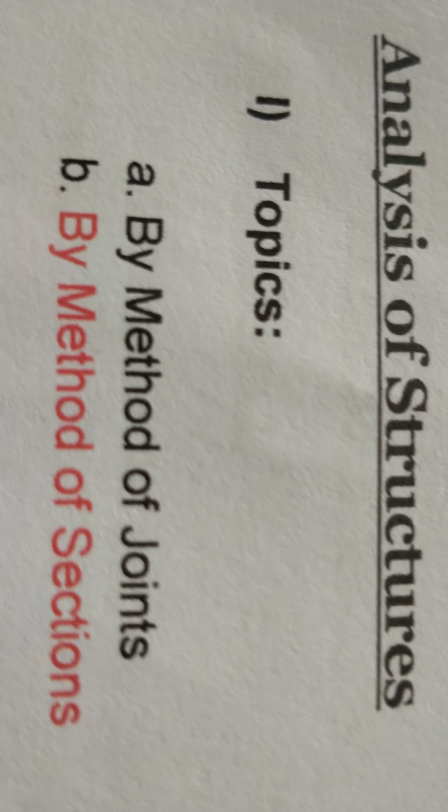Unlike the previous topic by method of joints, where you isolate joints, in this method of sections we are going to cut sections of any structure to analyze each member.

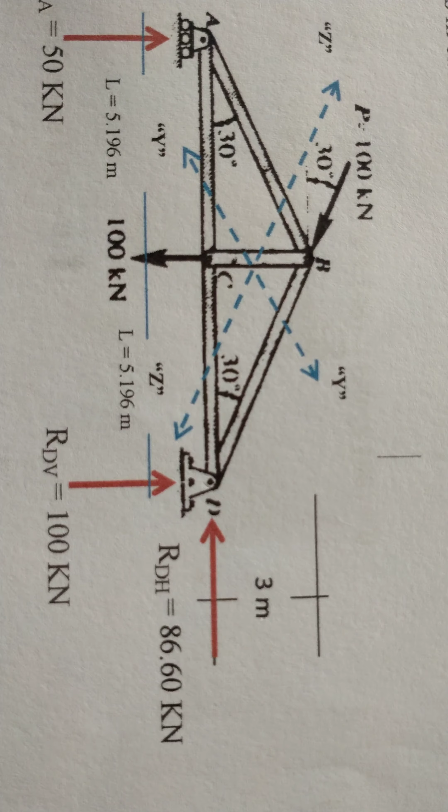This is a simple truss very similar to the example I gave you in the analysis of structures by method of joints. Don't be confused by the colored drawings, they are just there to help us analyze the problem.

What is important in this topic: one advantage of the method of sections is that you could immediately determine directly the stresses or forces in any member without passing through different joints.

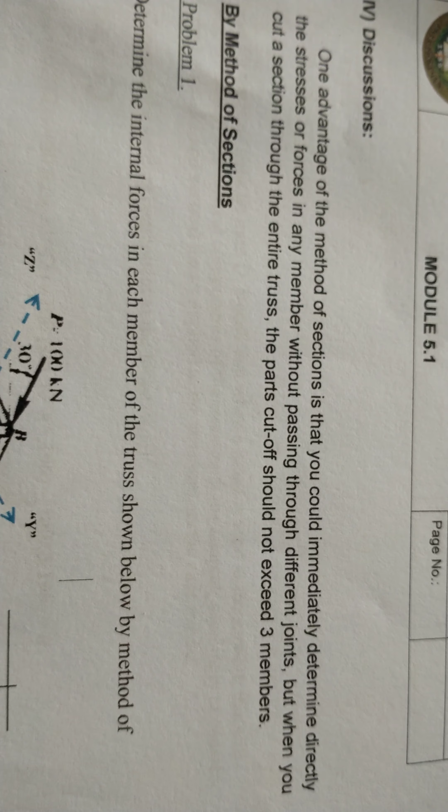But when you cut a section through the entire truss, the parts cut off should not exceed 3 members. So for you to understand this more clearly, we have this sample problem: determine the internal forces in each member of the truss shown below by method of sections.

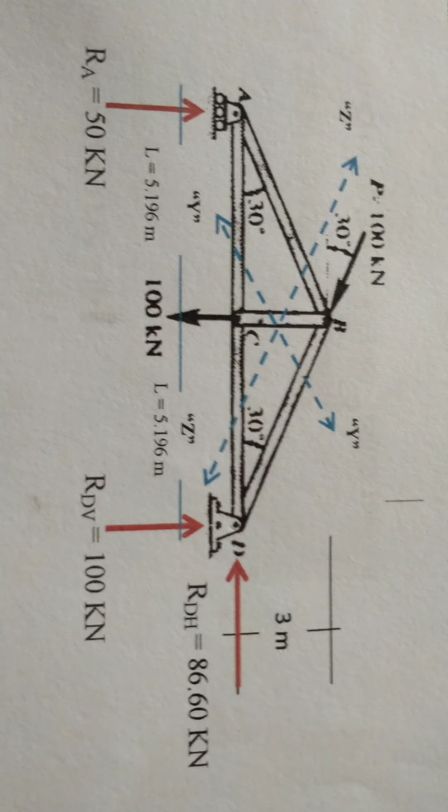So if you will notice class, let's focus first on the blue dotted lines, ZZ. ZZ on the left will be considered first because I deem it easier to solve. You will see this in the illustration later.

As we have been doing the process, we state the given, figure, and data shown. If there are important data that you should write, write them all as part of the given. And we have the requirements: the internal forces in members by method of sections.

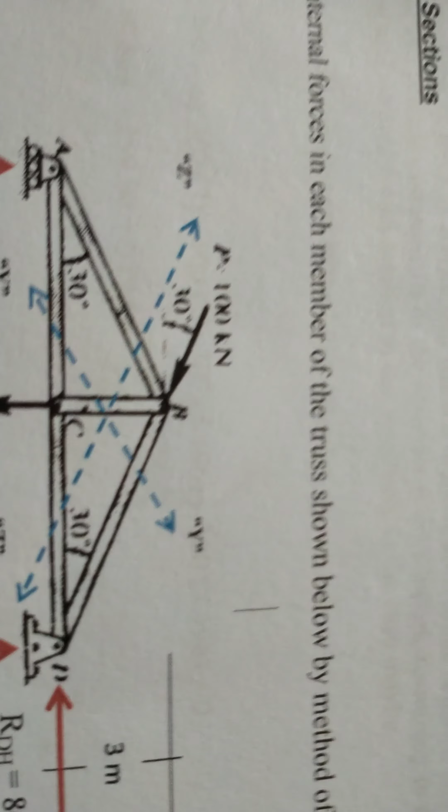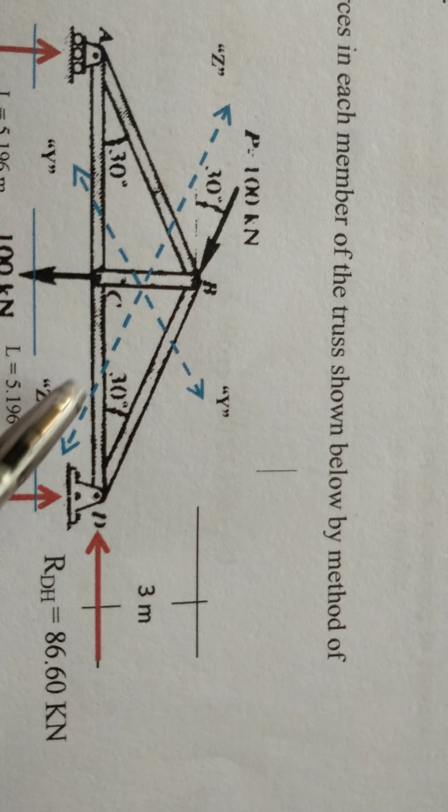So we have these members AB. If you will look at the figure, we have in here AB, AC, BC, CD, and BD.

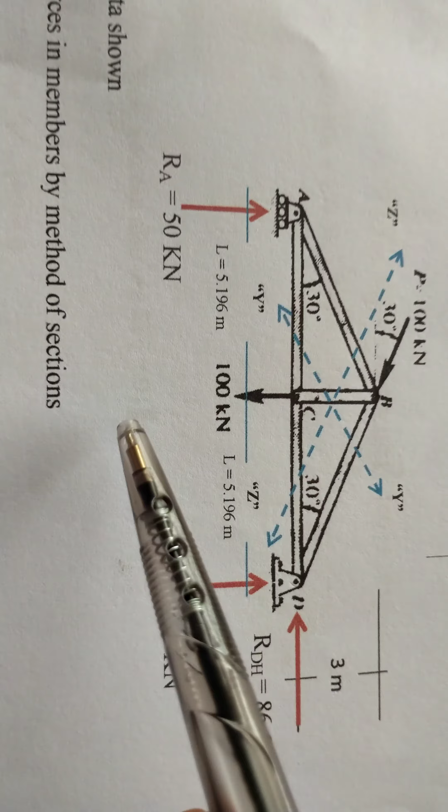For you to have a guide and easily solve the problem, you need to know first your L, because originally what are given are only the included angle, which is 30 degrees, the height of the truss, the load P, which is 100 acting 30 degrees horizontally on top of the truss, and a vertical load being carried by the truss, which is 100 kilonewtons.

As I've said, we try to simplify problems, or find whatever is necessary in solving a problem. With this problem, you need to know L, because if you are going to analyze structures by section, you need moment arms. So these are very necessary.

This one, the height and the length. Solving for your L, we have tangent 30 degrees. Tangent is opposite over adjacent, which we had previously as L. So we derived 5.196 meters.

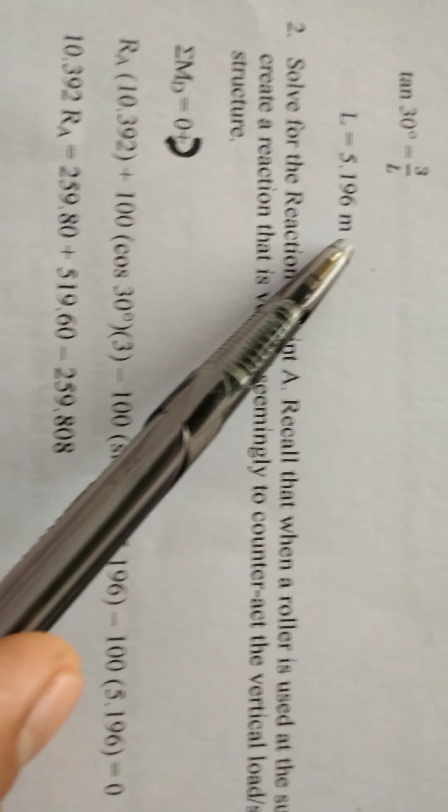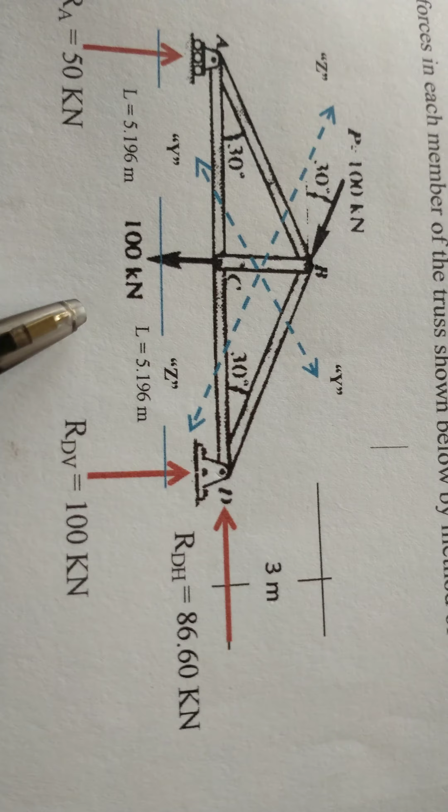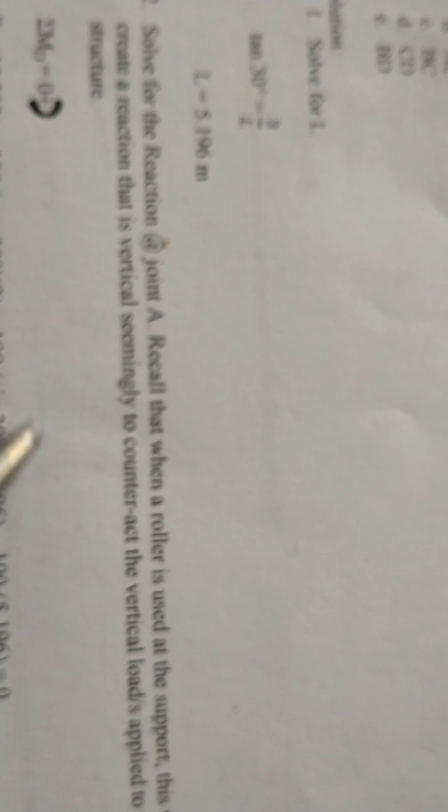So class, please observe that with your previous activities and exercises, I am very particular with units. Please always write down the units. If it is distance, it must be meters. If it is force, we use kilonewtons. And if we have moments, as previously discussed, moments are in kilonewton meter, because force times distance is the data being multiplied. So you need to indicate that also.

So in this case, you need to solve for the reaction at A, and in doing so, you need to take moments at D. So it is written here: summation of moments at D is equal to RA times the moment arm, RA times the moment arm from here. Okay, this is the moment arm.

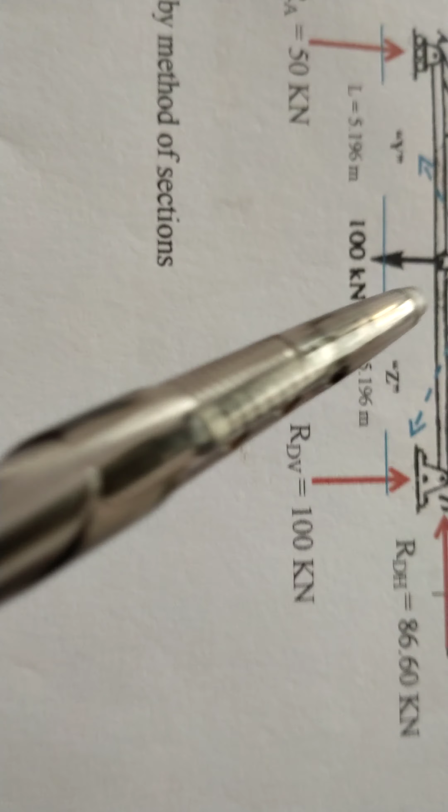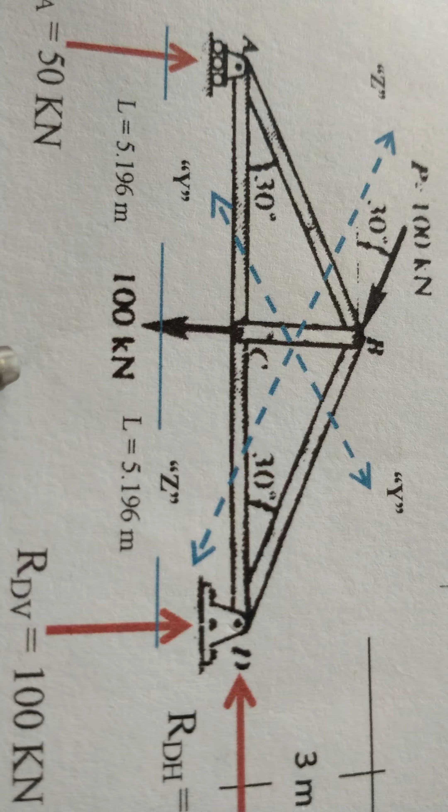5.196 plus 5.196 is 10.392. Then we have 100 cosine, because we are taking the horizontal component of 100, cosine 30 degrees times the moment arm from here. And we have minus the vertical component of 100, because it is going down, it will create a counterclockwise moment based from D. So 100 minus 100 sine 30 degrees times 5.196, because this will be the direction of the vertical component of 100.

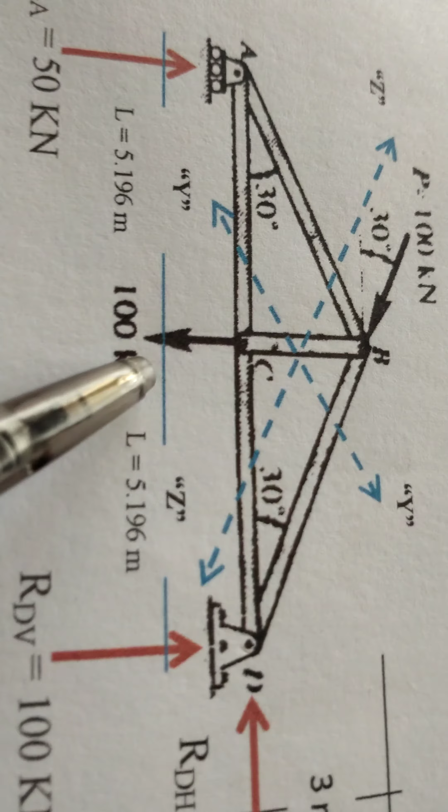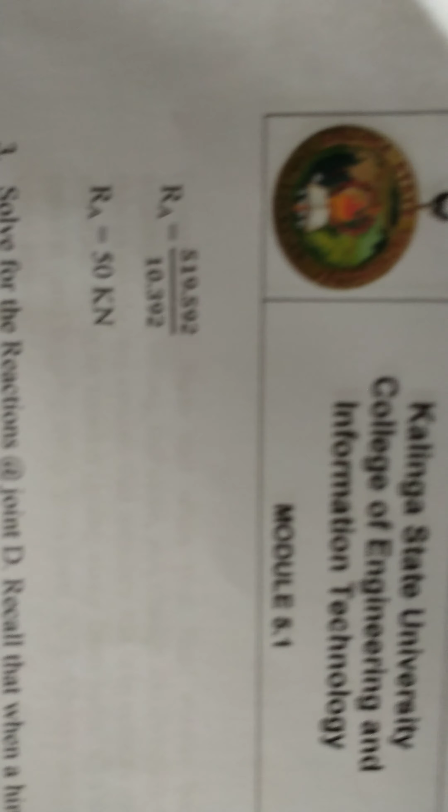Then we have 100, which is the given force, times the moment arm, which is 5.196, and it is negative because it will be acting counterclockwise. So computing this value, we have RA, the reaction at A, will be 50.0 or 50 kilonewtons.

And the next step will be to solve for the reaction at D. Since this is a hinge, it will create a horizontal and a vertical component. Can you follow, class? So we need to indicate the arrowheads of these two components.

So how are you going to solve for RDV? You just simply take moments at A, summation of moments at A, and you will arrive at this equation. So if you take moments at A, we have RDV times, what's the moment arm? 10.392. Then minus 100, which is the cosine of the horizontal force.

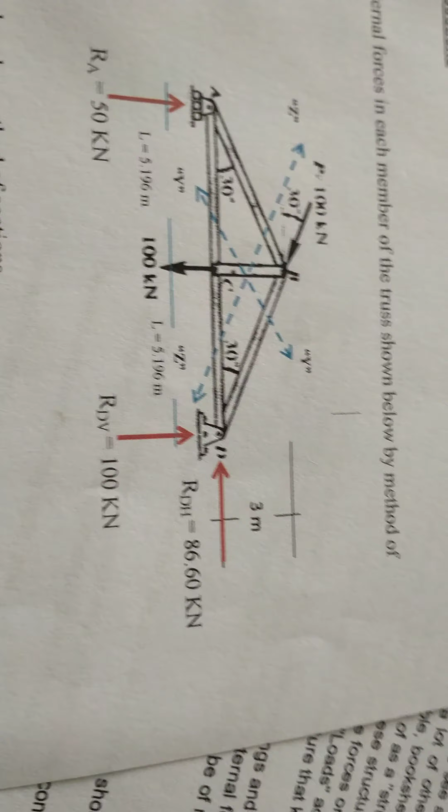100 cosine 30 degrees times 3. Okay, so going back again to determining the reaction or the components at D.

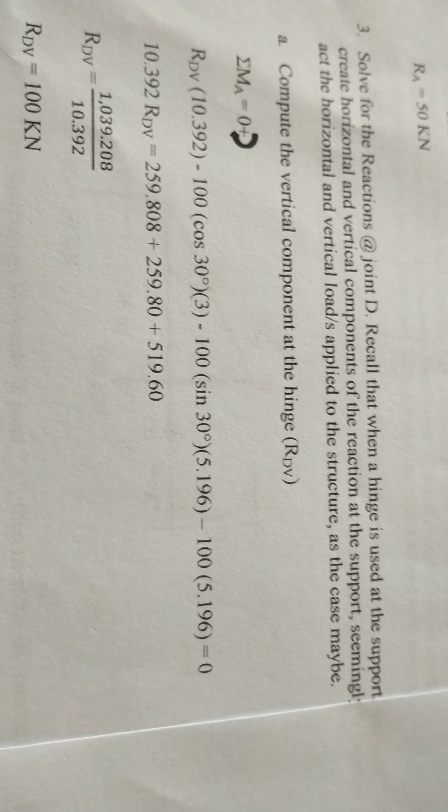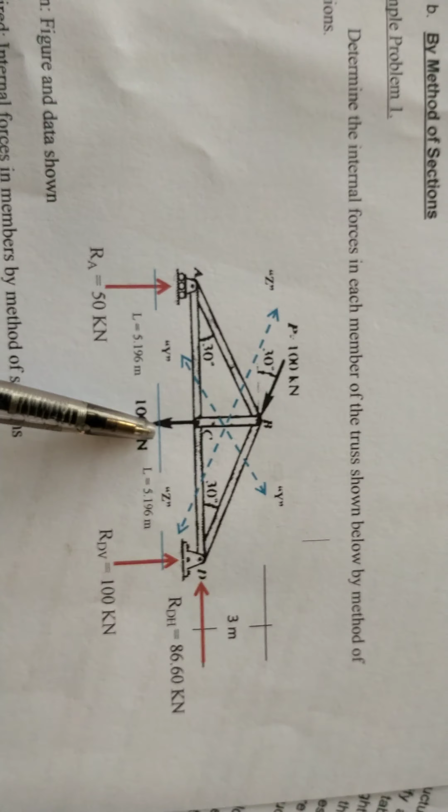So we need to take moments at A. If you are going to take moments at A, we have RDV, which is unknown, times the moment arm 10.392, minus 100 cosine 30 degrees times 3, which is the moment arm for the horizontal component of 100, and the vertical component, which is minus 100 sine of 30 degrees times 5.196, which is the moment arm, minus 100 times 5.196. This is the external load.

Going back to the equation, we derived RDV to be 100 kilonewtons.

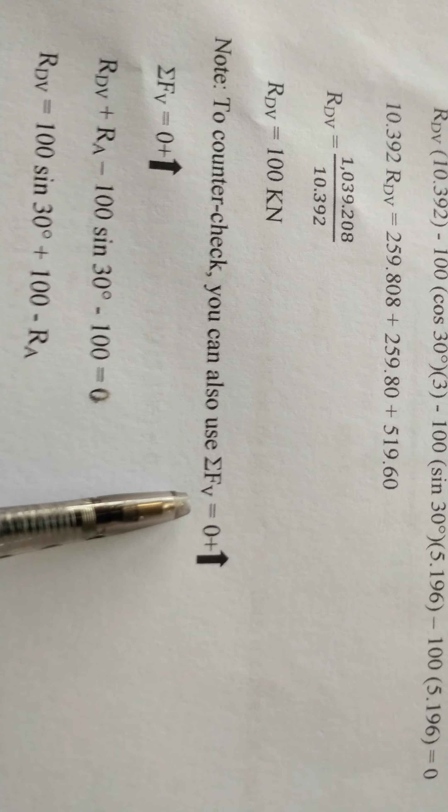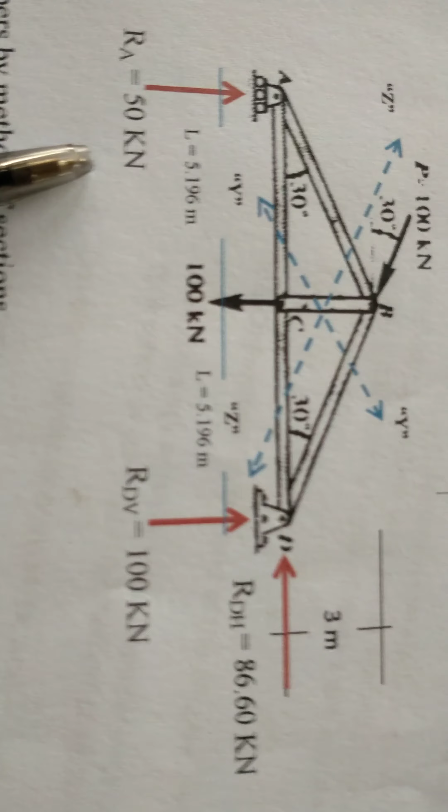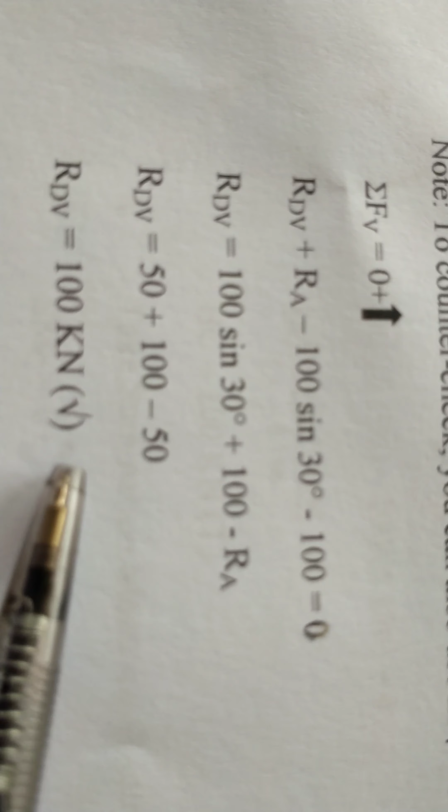Next, note that to counter check, you can also use summation of forces vertical equal to 0, positive going up. To counter check the value of RDV, since that is the unknown item, we have RDV plus RA minus 100 sine of 30 degrees minus 100, that will give you 100 kilonewtons. So it's correct.

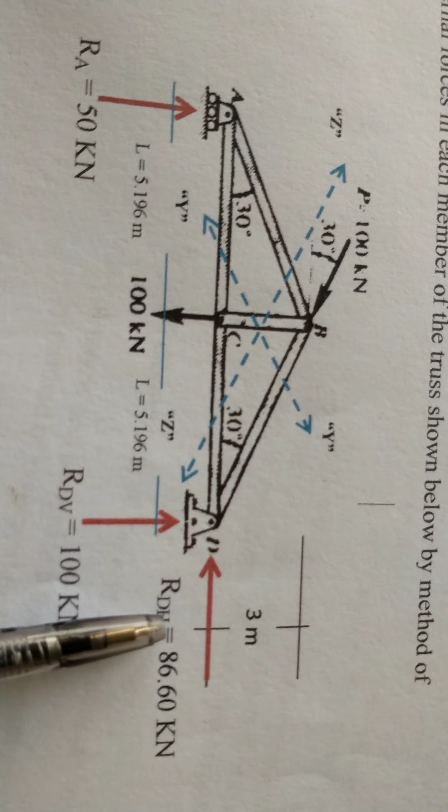Okay, next we have to solve for RDH. Just simply use your common sense here, because we have 100 kilonewton acting diagonally, and the effect of this load being introduced horizontally will be equal to this load.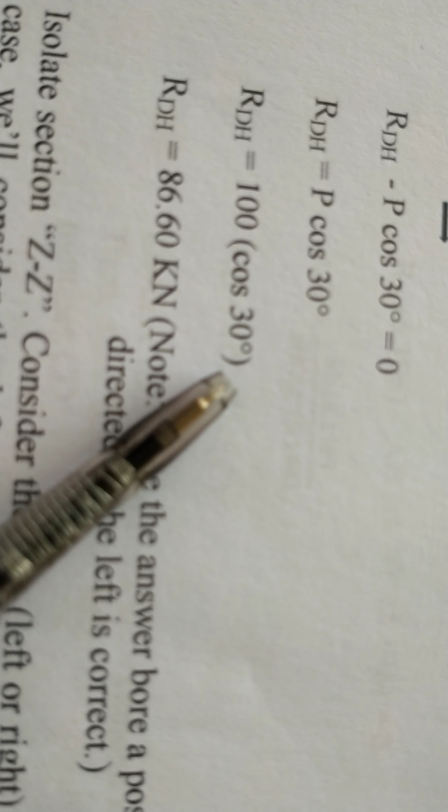Summation of forces horizontal is RDH minus P cosine 30 degrees equal to 0. So RDH is equal to P cosine 30 degrees. What is the value of P cosine 30 degrees? Of course, it is 86.6 kilonewtons.

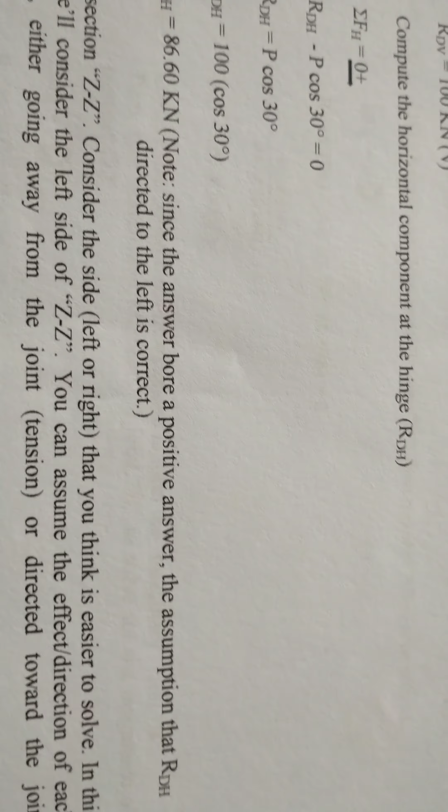As a reminder, note that since the answer bore a positive sign, the assumption that RDH is directed to the left is correct.

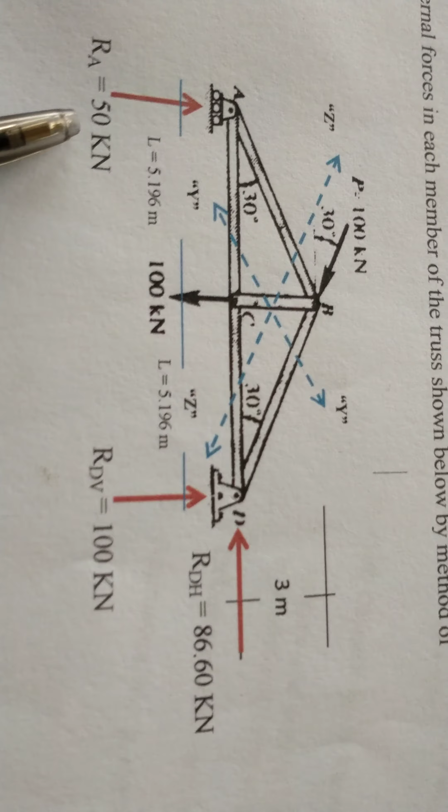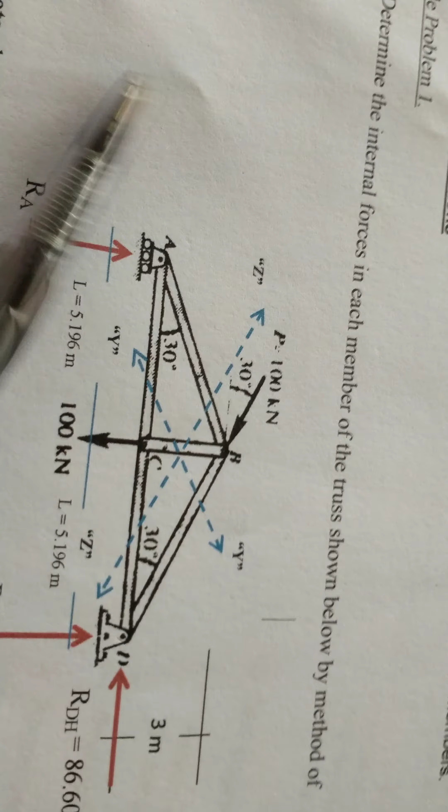Since all the values of the unknown items are already reflected, we already wrote them on the drawing, so for you to have a guide so that you will not be misled. Because if you consider this structure and this blue colored ZZ, which represents that this structure is cut here, in this particular case we try to consider this side, and all the items that you have computed or that are included in this section will be carried in the analysis, so that you will be coming up with correct answers.

Don't be misguided with that. So next is isolate section ZZ. Consider the side, left or right, whichever you think is easier to solve. In this case, we'll consider the left side of section ZZ.

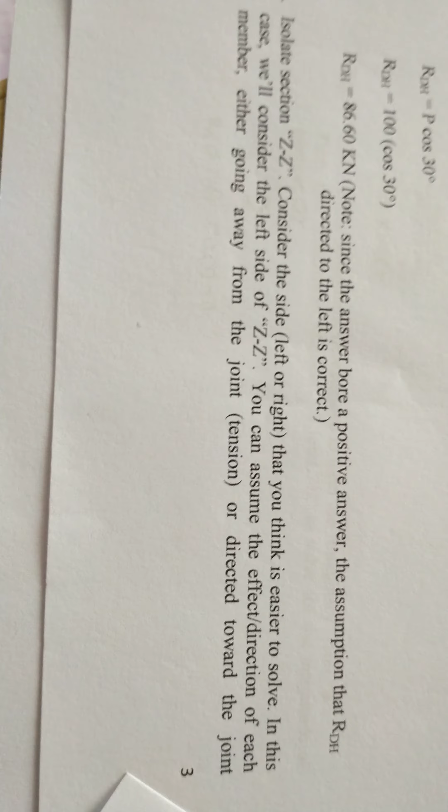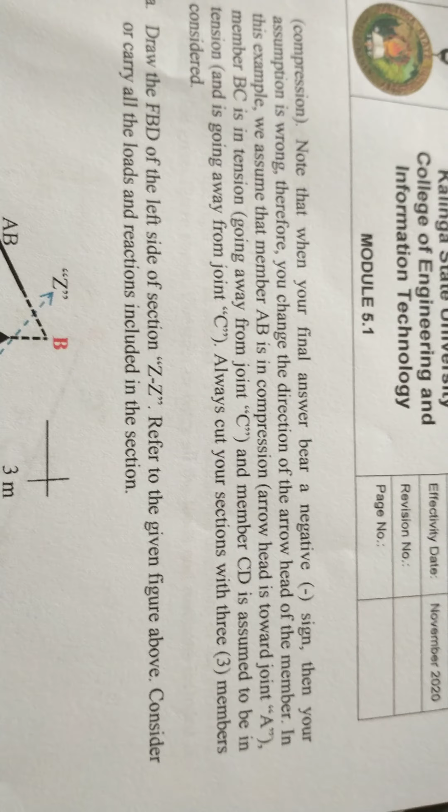You can assume the effect or direction of each member either going away from the joint, which means tension if the arrowhead is assumed to be going away from the joint, or directed towards the joint if it is in compression. Note that when your final answer bears a negative sign, then your assumption is wrong. Therefore, you change the direction of the arrowhead of the member.

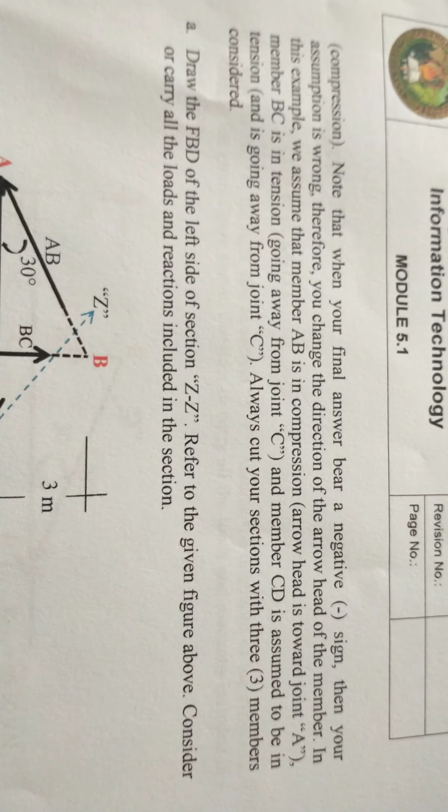In this example, we assume that member AB is in compression, arrowhead towards joint A; member BC is in tension, going away from joint C; and member CD is assumed to be in tension and going away from joint C. Always cut your section with 3 members considered.

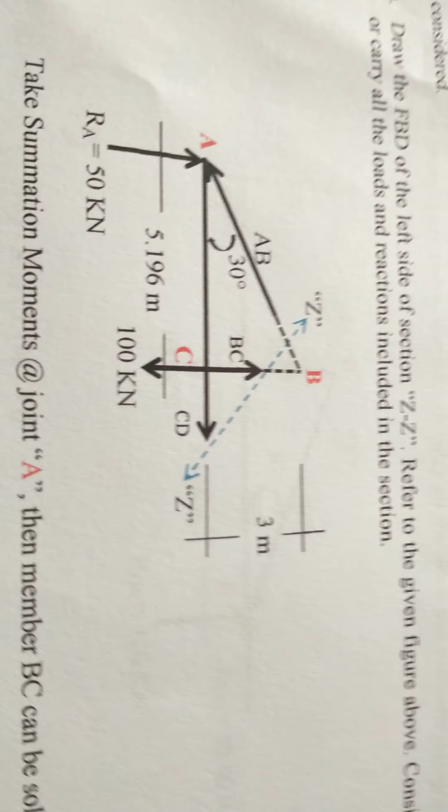Next step is to draw the FBD of the left side of the section, because that is the section that you considered. Refer to the given figure above, then consider or carry all the loads and reactions included in the section. If you go back to the original figure, ZZ is this one, so we consider this side.

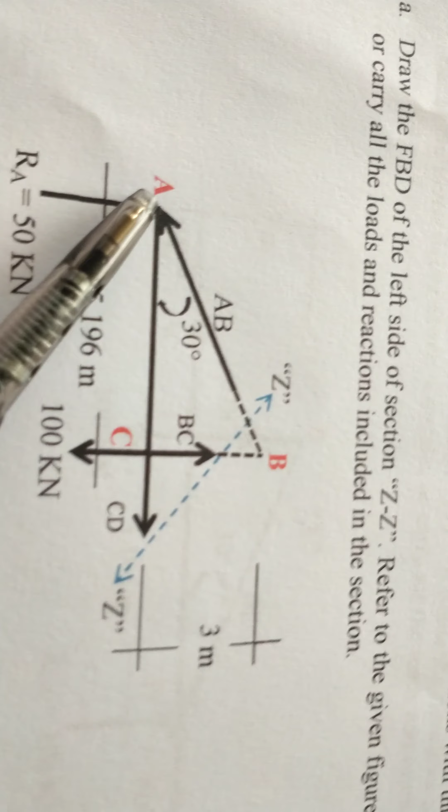As you can see, we have the 100 kilonewton, which is the external load, and the computed value of RA, which is 50 kilonewtons. We assume, as indicated here, AB is in compression, that's an assumption. BC, because it was cut, BC is in tension, and CD is in tension. So you carry again the measurement, or the dimension, and we have the same measurement for the height, which is 3 meters.

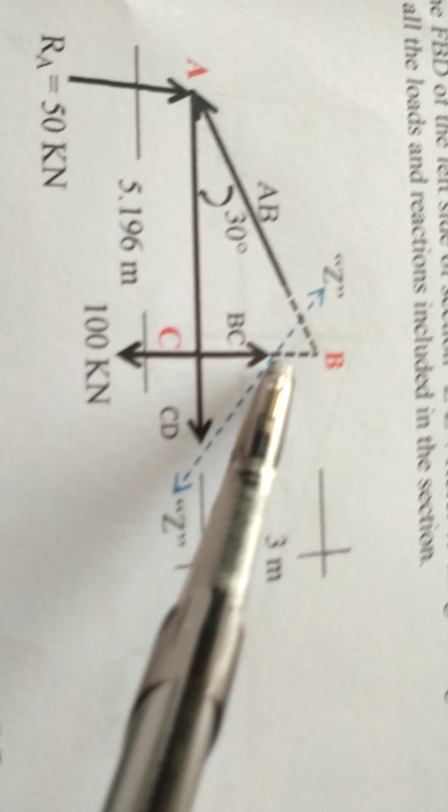If you observe, dotted lines are extended to form this joint B. Anyway, you'll discover later on why we did this. So we have this figure.

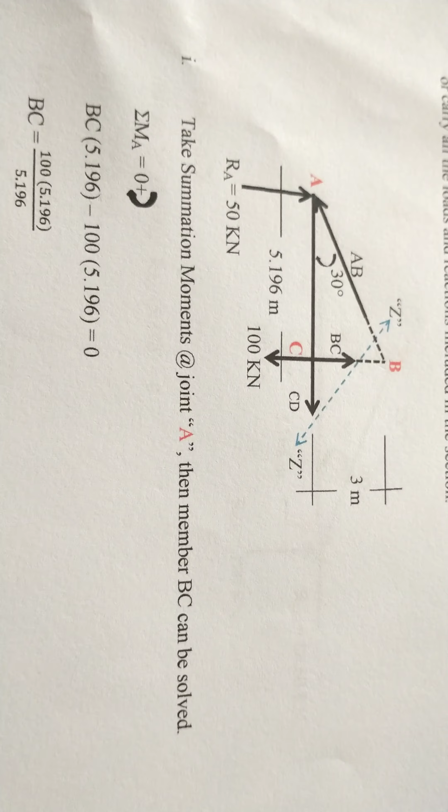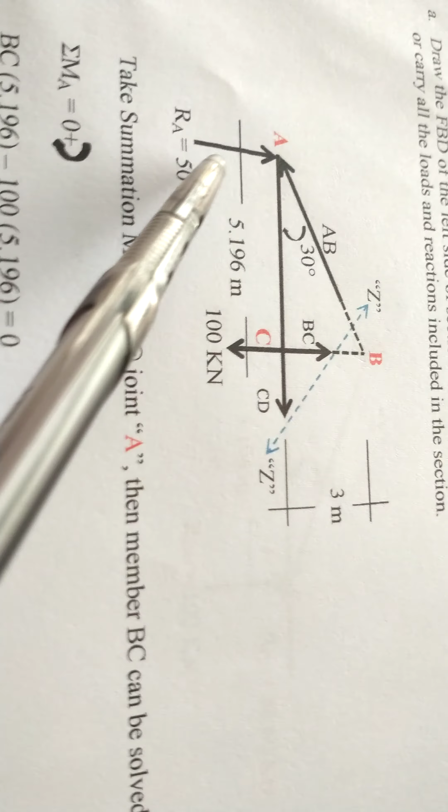You now take summation of moments at joint A, then member BC can be solved. If you take moments at joint A, AB will be eliminated, 50 will be eliminated, CD will be eliminated. So we have this and this, because they are actually 5.196 apart from joint A.

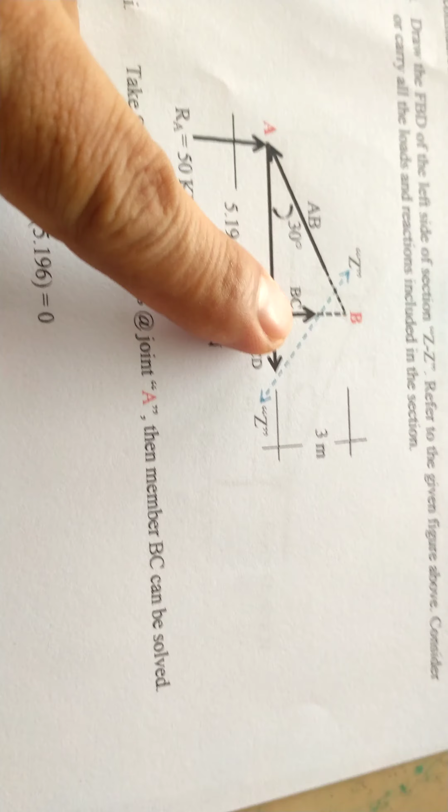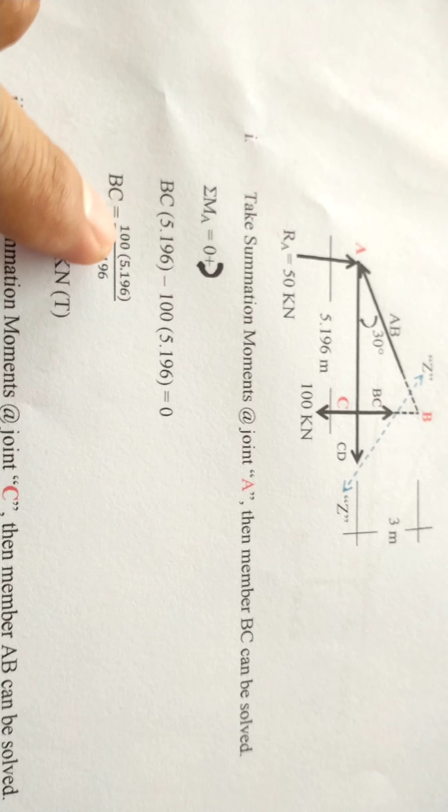Summation of moments at A, our sign convention is 0, positive clockwise moments. So BC, where is BC? BC times 5.196 minus 100 times 5.196 is equal to 0. Simplifying further, we have BC equal to 100 kilonewtons in tension. Our assumption is correct because it bore a positive sign. So BC is in tension.

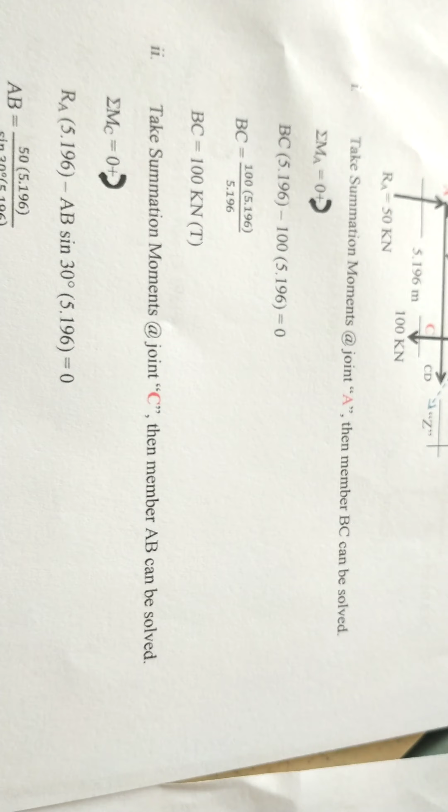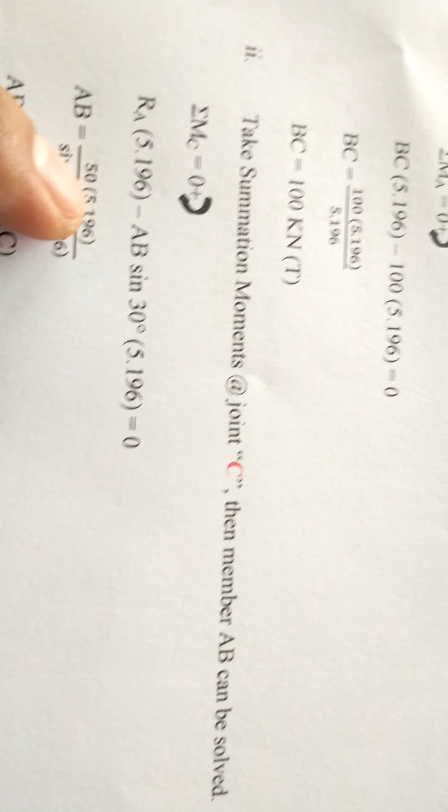Next is take summation moments at joint C. Then member AB can be solved. So summation moments at C, this is joint C, color red. Okay, so you take summation moments at C. Going back in here, so we have RA, this refers to the figure, RA times 5.196, which is the moment, minus AB sine 30 degrees times 5.196. So simplifying further, we have AB is equal to

100 kilonewton in compression. So we assume it as in compression. Okay, so we are correct.

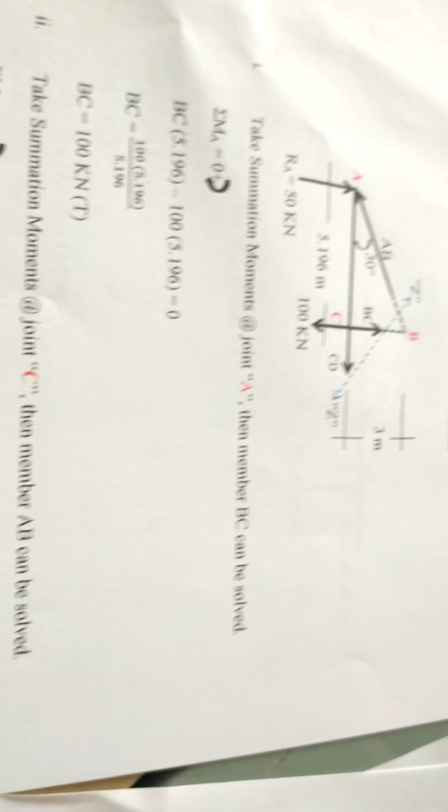The next, observe that this is what I'm saying earlier. Observe that dotted lines are extended to form the imaginary joint B. So we have these dotted lines to form joint B to solve for the magnitude of member CD. So you have extended this one.

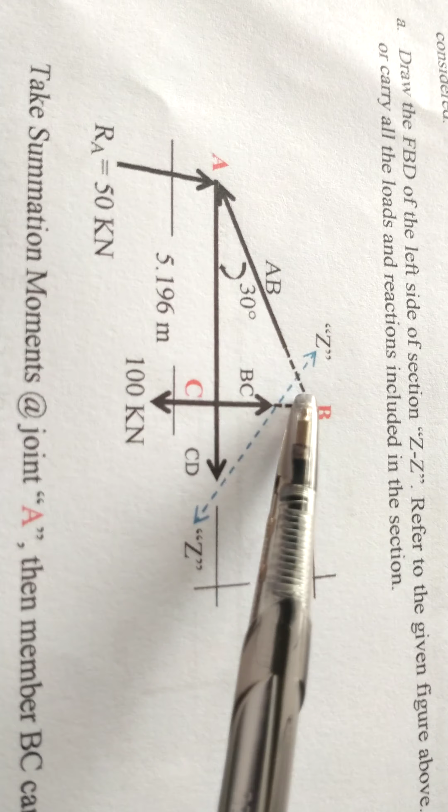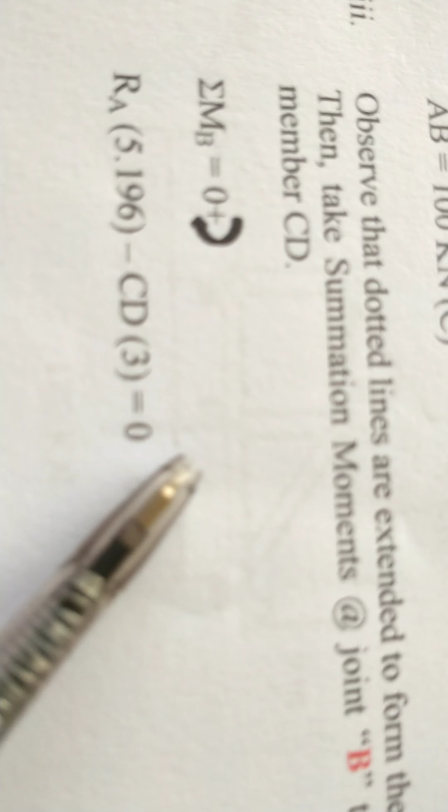Okay, so if you are going to take moments at B, you can solve for CD. Because BC and 100 will be eliminated since they will be passing this reference point of ours. So with AB, that gets eliminated. So we have RA and CD. So RA times 5.196 minus CD times 3 is equal to 0. Then simplifying further, class,

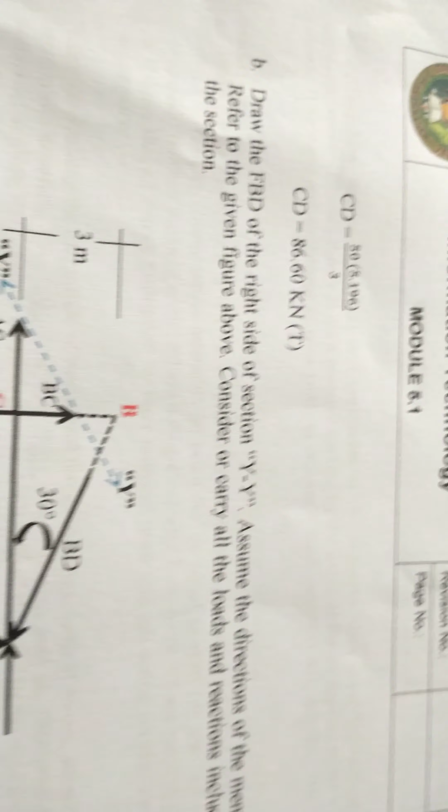CD will give us 86.60 kilonewton tension. So it's positive, and we assume that it is in tension, so correct. We are correct.

Next class, next step is draw the FBD of the right side of section YY. Assume the direction of the members. Refer to the given figure above, then consider or carry all the loads and reactions included in the section. Just follow what we have done on the previous sectioning or section ZZ.

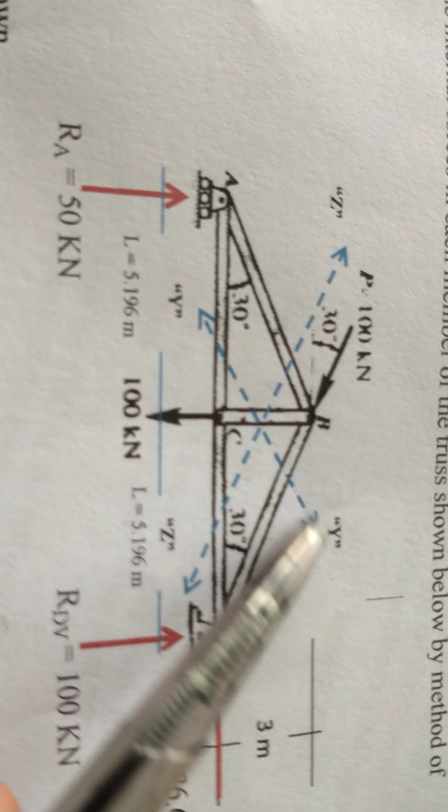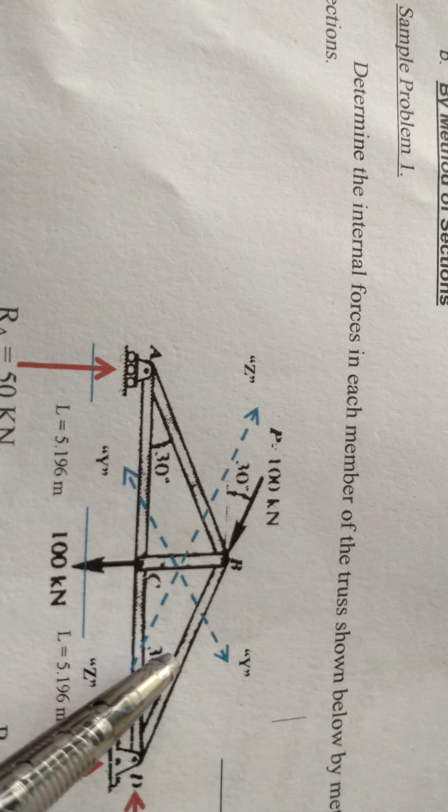Okay, so in here, you're going to consider again, class, the original figure. We have this section YY, this one. So if you are going to consider the right section, this is what we'll take. So we have in here AC, which I think is to be computed. BC is already computed. So what we are going to compute in this particular sectioning is BD and AC.

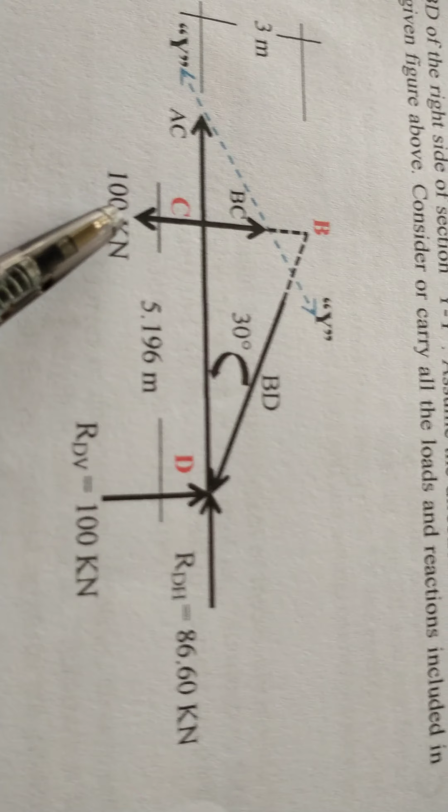So if you will notice, class, we have again three members, AC, BC, and BD, that were cut to form the section YY, right portion. So as I've said, class, we need to carry or include all the computed values that we have previously solved. So we have RDH, which is 86.6. We have RDV, 100 kilonewtons. Then we have the external load, which is 100 kilonewtons.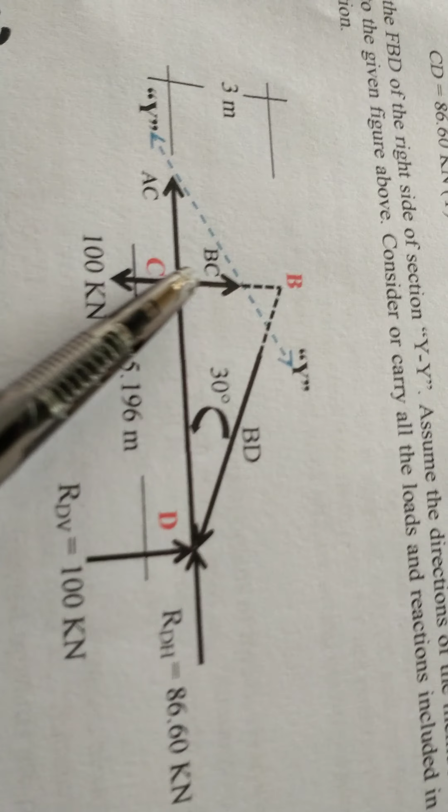Actually, if you will notice, class, at joint B, we don't have our load of 100, the P, because it got cut off. So in here again, class, we have BC, which was previously computed, and AC, which we are going to compute. So 3 meters still is the height of our truss, and the distance in here from C to D, like just like A to C, we have 5.196 meters. It hasn't changed. So let's try to consider this.

So I think at this point you can follow, class. Okay, so if you are going to take moments at C here, AC, BC, and 100 get eliminated. So what can be solved regarding this? We can solve BD. Because if you are going to take moments at C, BD, which will be creating the vertical component, will be considered in here, so sine, that's why sine 30 degrees, and what is the distance?

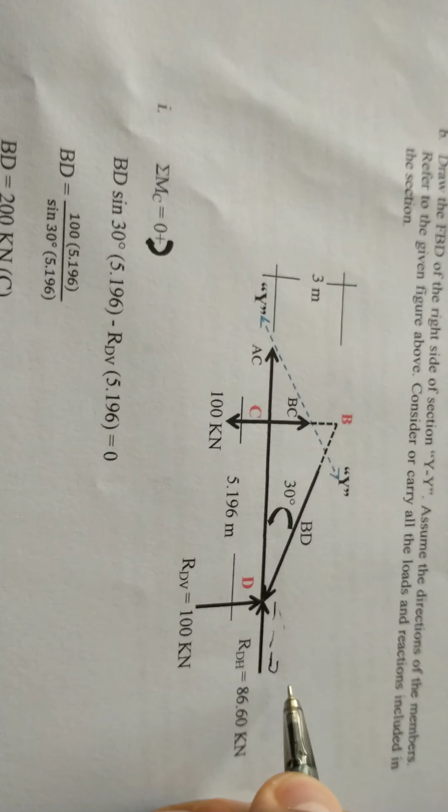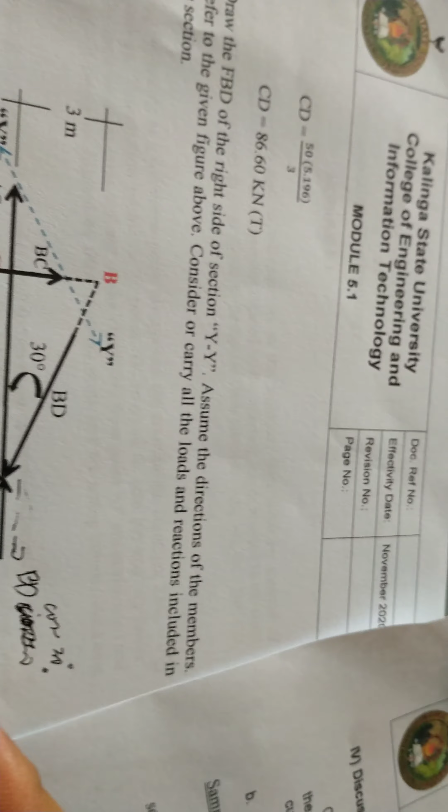Actually, if you're going to draw imaginary the components of BD, it would look like this. This is BD sine of 30 degrees, and we have also the vertical component, which is cosine. This is cosine, sorry, this is cosine 30 degrees, and this will be BD sine 30 degrees. So going to take moments in here, class.

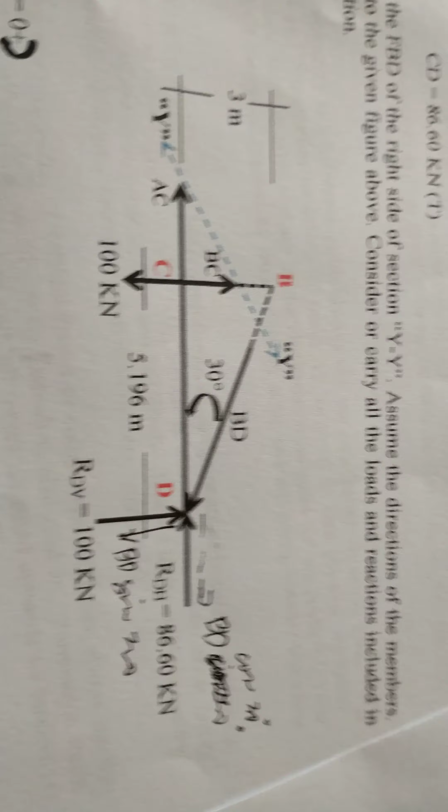So the BD cosine, the horizontal component, is eliminated, and only the vertical component remains. So we have in here BD sine 30 degrees times the horizontal distance, which is 5.196, minus RdV, because it has a moment arm from here, which is also 5.196. So simplifying further, we have BD is 200 kilonewtons.

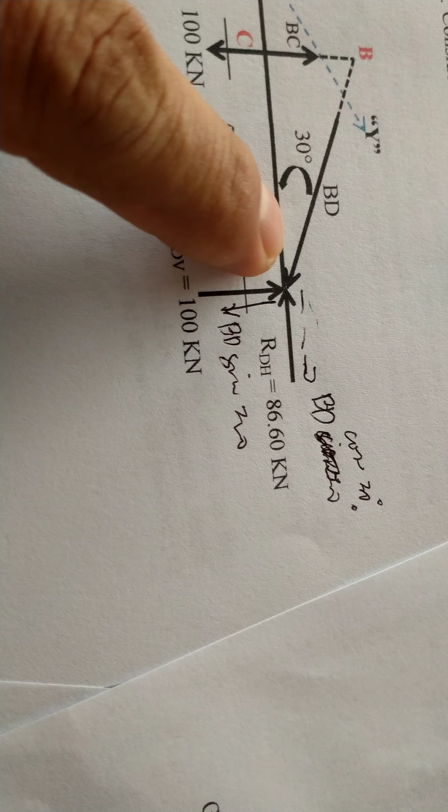So we have a positive answer. So the assumption that BD is in compression, because it is going towards the joint, is correct. It is in compression, that's why C was placed there. Okay, so next is, we have to solve for AC.

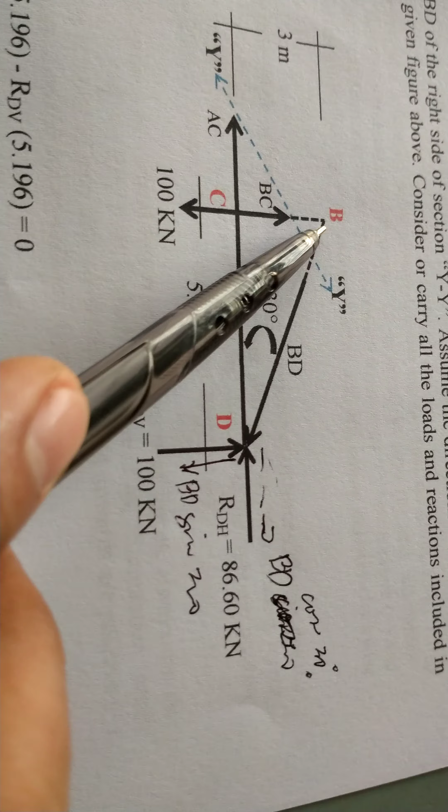AC. Where is AC now? So this is AC. So how are we going to solve for that? So summation moments at B. If you take moments at B, BC and 100 will be eliminated because they will be passing here. So with BD, what's considered in here is the BD cosine 30 degrees.

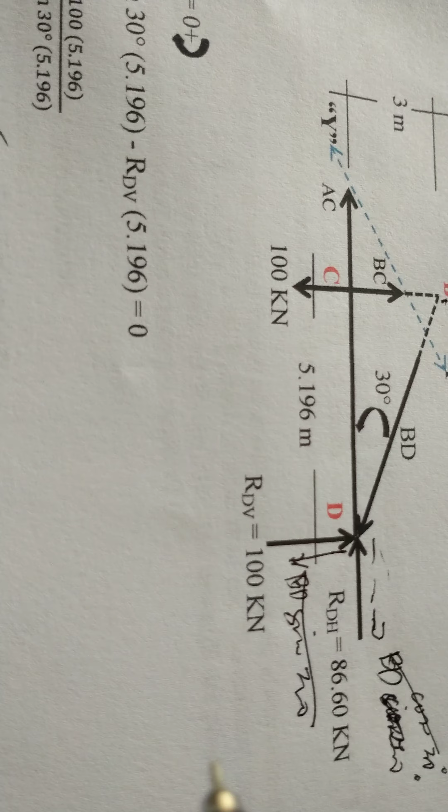0, positive clockwise moments. Okay, so we have AC times 3. AC times 3 because that's the moment arm. Okay, it is clockwise positive, because when it acts like this, it's clockwise. Okay, AC times 3, the moment arm is 3, plus RDH, plus RDH. Where is RDH? RDH, it is again clockwise, times 3, still 3 from here to here.

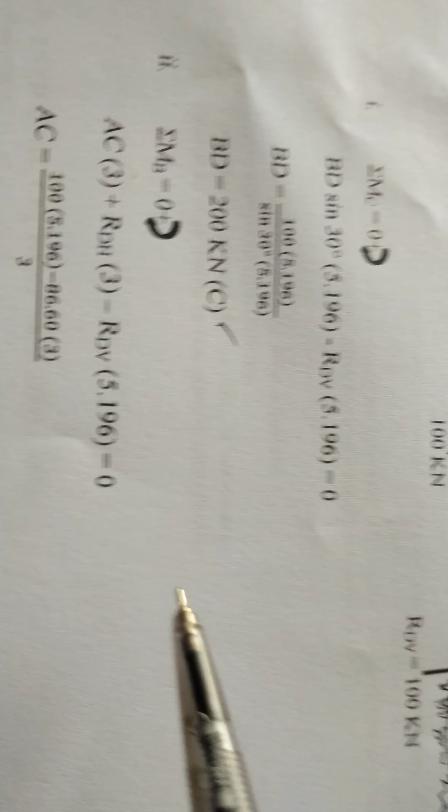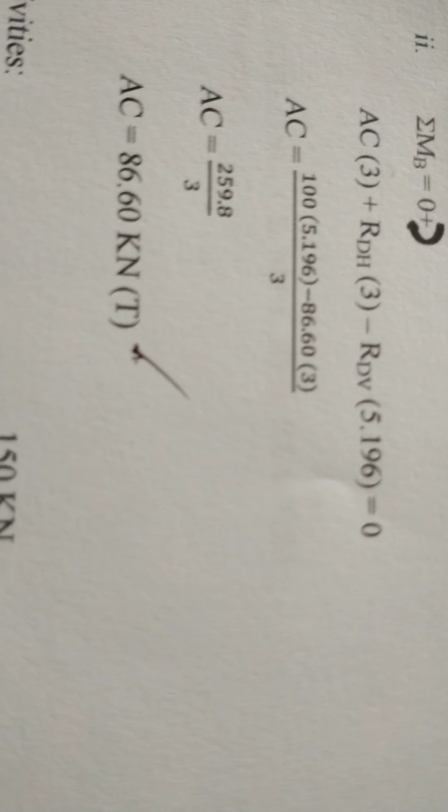Okay, for RDH, minus RDV because this is our reference point and the effect of RDV is counterclockwise. So we have a negative RDV, but what is the moment arm? That is 5.196 meters. So simplifying further, we have AC is 86.6 kilonewtons, and it is in tension.

Anyway class, that's all for the day, and after this lecture, you need to solve, of course, a problem which will be included in your module. Thank you very much.